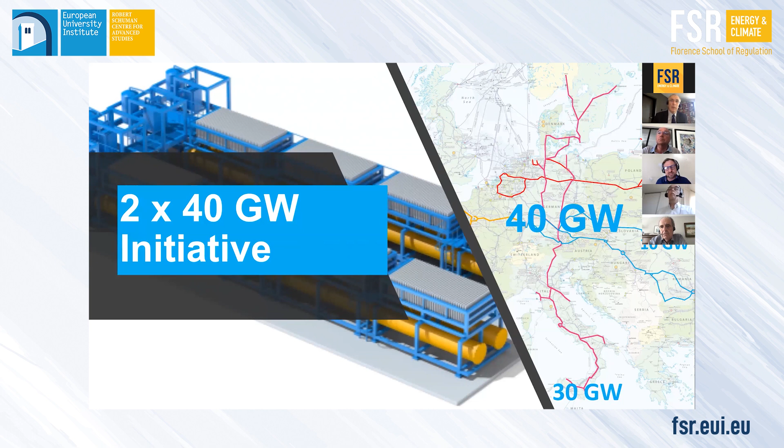Let me come to the next slide, please, which shows us the initiative that we discussed definitely with Commissioner Timmermans, and he himself had the idea to include this initiative into his plans. So it's called 2x40 gigawatt initiative. Next slide. You will see that we issued a brochure that you can download on a website which is called Hydrogen for Climate Action. Next slide.

Yeah, this is the paper, and we developed the paper together with non-Europeans. So 40 gigawatt would be in Europe and 40 gigawatt outside Europe. And we have here our Ukrainian friends who have ready pipelines that will be empty in some years, and they could produce, because they have also wind and sun in the east, and they are part of this initiative, like the Clean Energy Net, that's the Gulf Cooperation countries, the African Hydrogen Partnership, and DII, which is a follow-up on Desertec, and very much focusing on hydrogen.

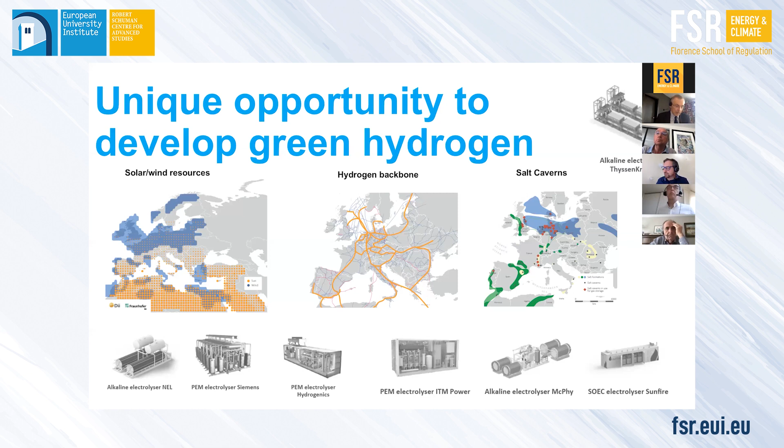Next slide, please. The roadmap says that we have 40 gigawatt production in Europe, where we would like to ramp up this capacity within the next 10 years. We have already a captive market of 6 gigawatt that could be used.

It was mentioned, refinery, fertilizer, and we would produce 34 on top for new customers, like in industry and in mobility. So this 40 gigawatt electrolyzer capacity in Europe would produce 4.4 million tons of hydrogen in 2030, representing 25% of the total EU hydrogen market in 2030.

This shows some dimensions. In Africa and Ukraine, it's a little bit different because you already have a bigger captive market in some of these places, like Morocco, where hydrogen is already produced renewably and already used in the fertilizer industry. So it's quite interesting. And that intrigued, I think, the special interest of the Commission. We have heard that in the college, it was not only the mentioned commissioners interested, but also others, the ones who are responsible for development. Andris knows this field very well, or the commissioners who are responsible for the neighborhood policy, because you can create value in this neighborhood, especially Northern Africa.

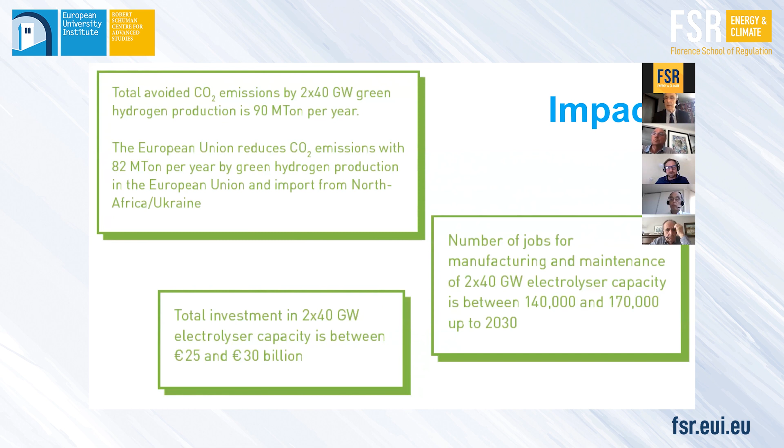Jorgo, I'm sorry, could you wrap up, because we also have other speakers. They are the last slide.

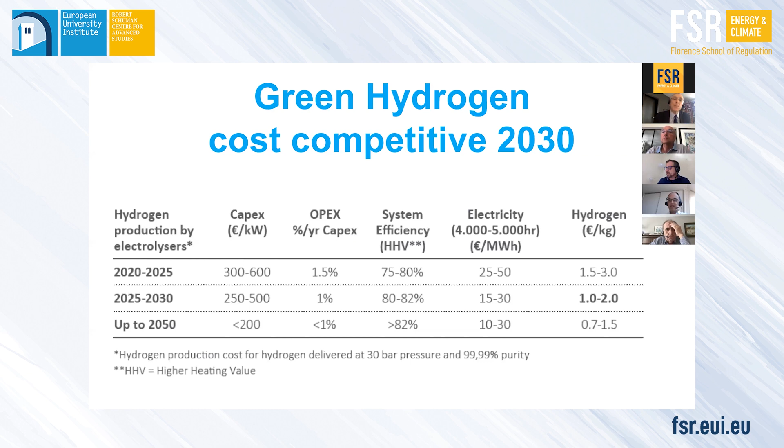Yeah, thank you. And what you see is that the efficiency also needs to be brought up. This is also an important part of this equation, and that's why we need to be still active. Next slide shows, and I will use this as the last slide, that this is not only energy policy. It's not only a policy on innovation, it's industrial policy. So if we scale up electrolyzers, we can integrate much more wind and solar using hydrogen. So we are not against wind and solar. Hydrogen is the partner of it, and it could really outcompete very, very fast other actors and players.

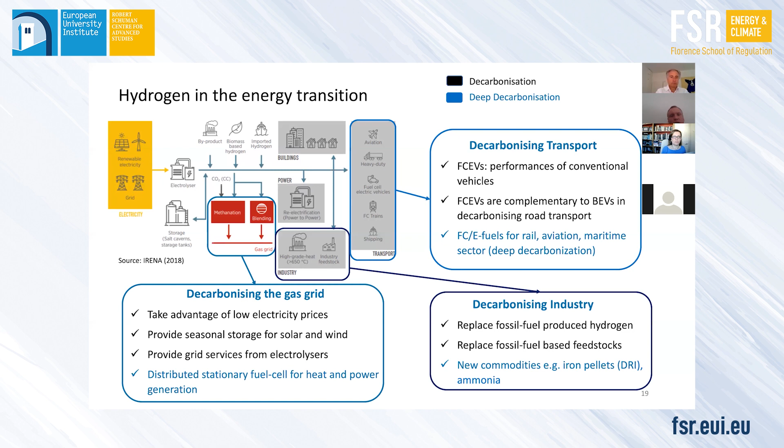Next slide, please. So as was said, hydrogen is not an energy source, it's an energy carrier. You need to produce it from some primary energy source, but it has a wide range of applications that are discussed today. Next slide, please. So we just issued on Monday our latest global outlook, the Global Renewables Outlook. And in that outlook, we also identified a key role for hydrogen and especially for green hydrogen in the global energy transition. Next slide, please.

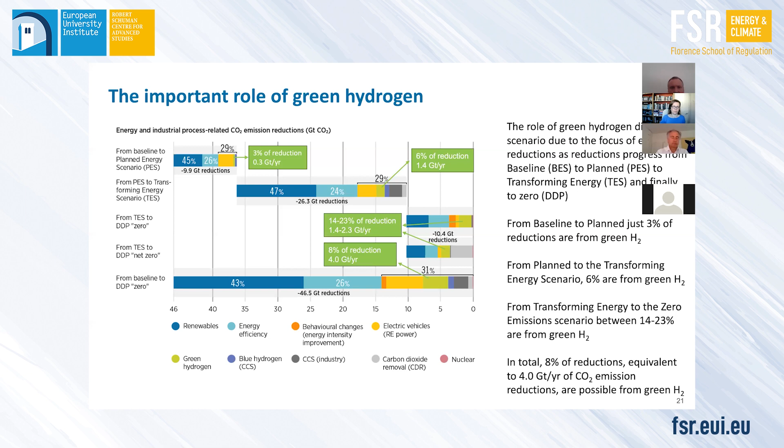And the advantage of hydrogen as an energy carrier is there is a lot of experience with hydrogen. It's a commodity today. Around 120 million tons of hydrogen are produced and consumed every year. And we think by 2050 that may double in this Transforming Energy Scenario, the well below 2. It may quadruple or even grow stronger if we go for total decarbonization. Next slide, please.

And the role of green hydrogen is very important. We think that an important share of total final energy demand can be supplied by green hydrogen, around 8% by 2050, and that up to around 20% of all electricity in this well below 2 Transforming Energy Scenario would be used for green hydrogen production. Next slide, please.

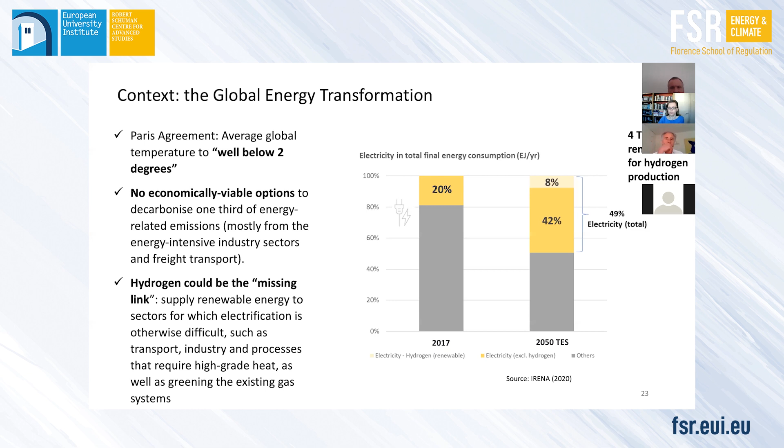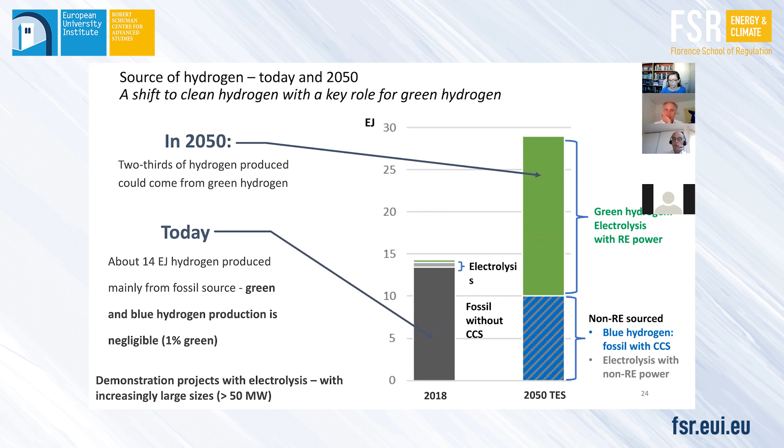And so today, only 1% of all hydrogen is green hydrogen. We think by 2050, 2/3 of all hydrogen could be green hydrogen, and around 1/3 would be blue hydrogen. Next slide, please. Now, what is critical for that is that the costs are reduced to acceptable levels. And to give you an idea, what is an acceptable hydrogen price? If you have hydrogen at $3 or €3 per kilo, then you need about 8 kilos of hydrogen for a gigajoule of hydrogen. So a gigajoule of hydrogen would cost around €25.

And today, a gigajoule of natural gas costs less than €10. So at €3 per kilo, hydrogen is still a premium fuel. You need to get to even lower prices. Now, how do we get there? It requires two things. It requires very low-cost renewable electricity, 1 or 2 cents per kilowatt hour. If we're at 4 cents, you will not reach these levels. And that is important for the discussion about, are we going to produce in Europe or are we going to produce elsewhere?

Second point for the cost reduction is the cost of the electrolyzer. So Jorge already presented this $200 per kilowatt. Today, we're still quite far away from that. And also we need to be careful that we're talking here about costs of projects, not just the cost of the electrolyzer machine. There are also significant balance of plant costs that need to be considered. So there is still quite a long way to go to these low costs, and we should pay sufficient attention there. Next slide, please.

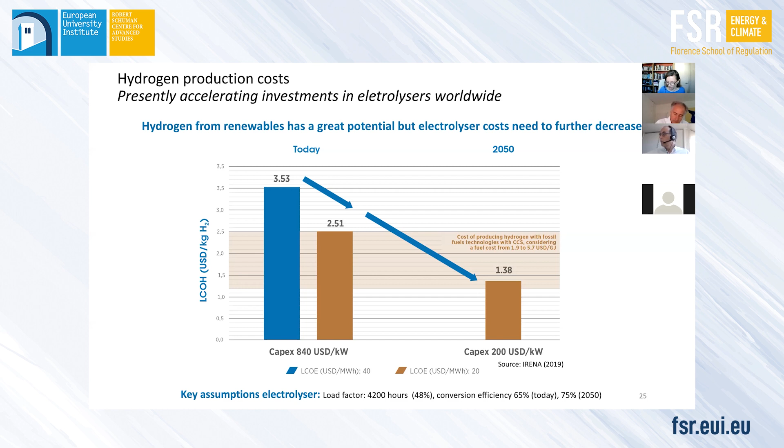Now, we also see important opportunities for hydrogen in hard-to-abate sectors. One of the sectors where we had a closer look is the iron and steel industry. There are currently initiatives to produce direct reduced iron in Europe with hydrogen. But you could also think of using green hydrogen at the places where you mine iron ore and ship the DRI to Europe.

We saw in the Commission presentation that there's thinking also about hydrogen imports, but why not import commodities produced with hydrogen? That may be a strategy that is easier and more economic to implement than importing hydrogen. So that's an input to the discussion. Next slide, please.

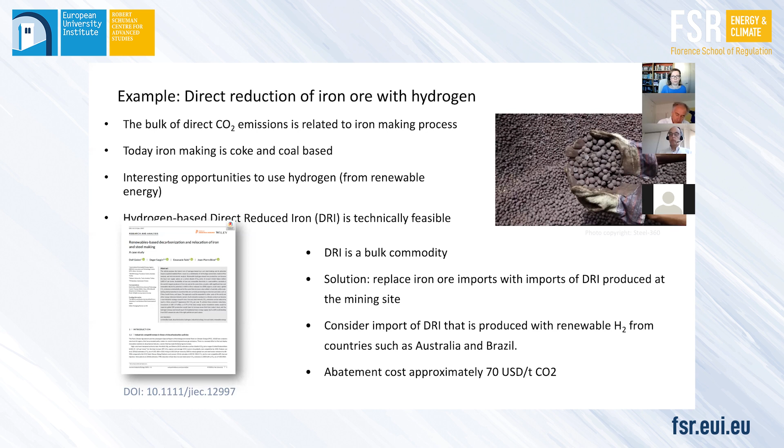Also in transport, we see interesting opportunities. One of the sectors where this is discussed is shipping, where there's now strong interest in ammonia produced from green hydrogen as a fuel. Currently the first tankers using ammonia fuel are being built. It's still early to say whether this is the solution that will be selected, but there's a lot of attention for this option at the moment. Next slide, please.

Then, the issue of hydrogen in gas pipeline systems. A lot of attention there, but we need to be very aware that there are important standards and regulatory barriers that need to be tackled before we can move to a hydrogen transition in this sector. That's usually an area that requires time for adjustment. So that also needs attention if you want to go well beyond 20% hydrogen in the gas system. And then next slide, please.

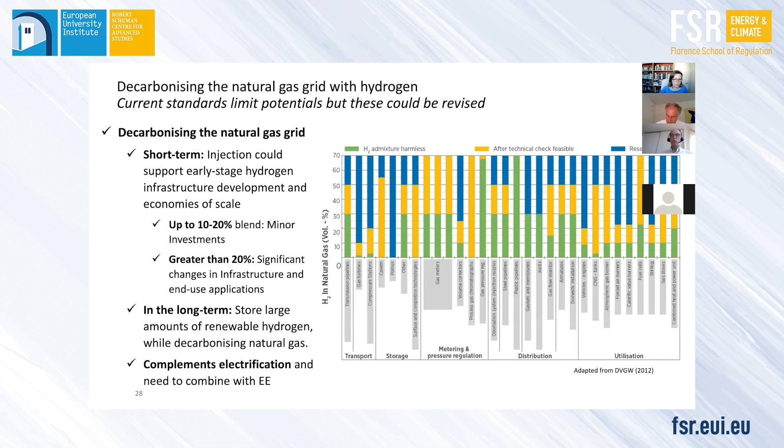So this is my last slide. As said, we see a great role for green hydrogen. We're very happy that in Europe that's now so high on the agenda, and we're happy to support this transition. Thank you very much for your attention.

Thank you, Dolf, for an excellent presentation and also for keeping time. That was really remarkable. Now I would like to give the floor to Kees van der Leun. He's director at Guidehouse, and I think well known to the communities that will be listening to us. Kees. Thank you, Andris, and welcome all. Yes, Guidehouse, you might know us by our previous names of Ecofys and later Navigant. We're still there.

Today I want to speak to you about a new study that we've just published this morning. I also shared the link in the chat, and that's for the Gas for Climate Consortium. The Gas for Climate Consortium consists of 10 European gas TSOs, the transport companies, and 2 renewable energy associations focusing on biomethane. We've been working with them for 3 years now to analyze the role that the gas infrastructure can play by transporting renewable and low carbon gases in moving towards a net zero emissions EU energy system.

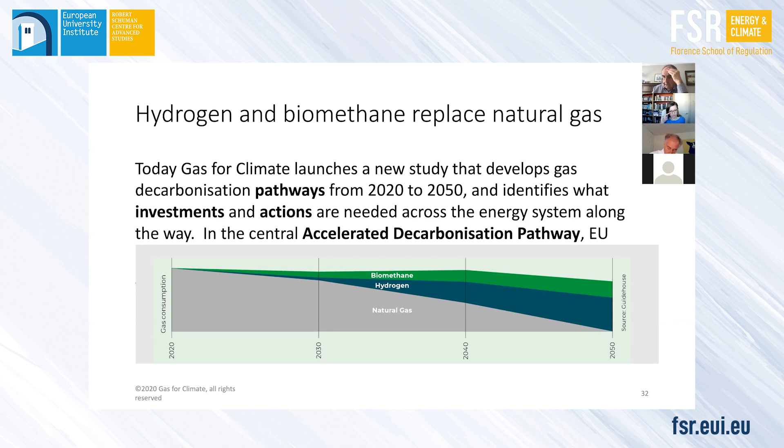You see a role for biomethane. That's refined biogas from anaerobic digestion, so from agricultural waste, but also from sequential cropping, a new agricultural process developed in Italy and France, for example. And you see there also in the blue band the growing role for hydrogen in our view on the EU energy system. Next slide, please.

In this accelerated decarbonization scenario, we're looking at a CO2 price of 55 euros per ton CO2 by 2030, and that should be roughly enough to see the conversion of a lot of current gray hydrogen production, from natural gas without CCS, by adding CCS to blue hydrogen. That's already a decarbonization measure in industry that can be taken quite rapidly, and there are sizable projects already in an advanced stage of preparation.

Then we see potential to also develop new blue hydrogen plants to some extent, and that could be based on autothermal reforming, a technology which enables a higher capture rate at more attractive costs, and that could deliver another 430 terawatt hours by 2040. When I speak about terawatt hours, you can think about the current natural gas consumption in the EU, which is around 4,500.

So this would be a little under 10% of the current natural gas consumption. Those blue hydrogen hubs do not have to wait for a big expansion of renewable electricity, and as I said, they can piggyback on existing gray hydrogen production. We would expect them to develop first in industrial clusters around the North Sea, where most existing hydrogen production plants are located, and where also the possibility for offshore CO2 storage in depleted gas fields exists.

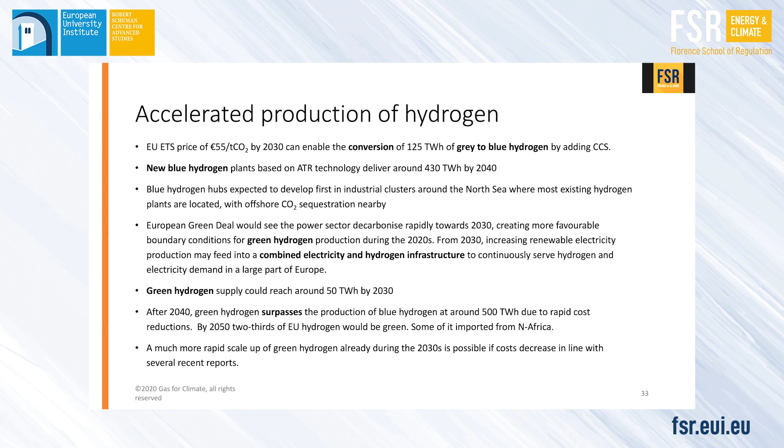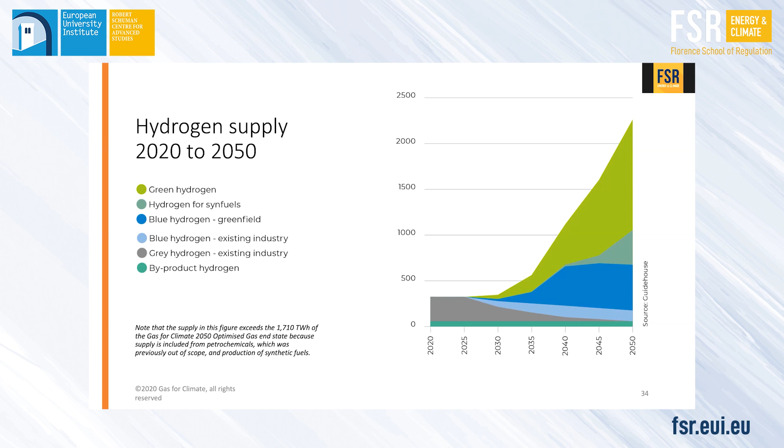So if we could go to the next slide. Or was that already my last slide? No. Then this would be the timeline for developments in our view.

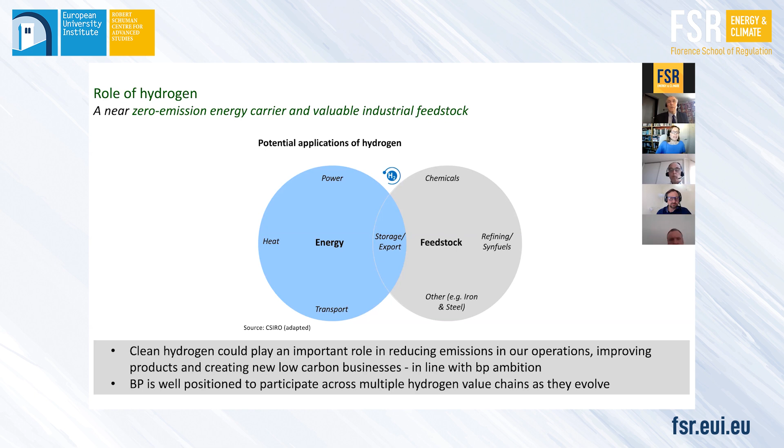So as kind of represented on the chart, we see, similar to the many other speakers and many other advocates of hydrogen, broad application across energy systems, and we believe particular potential of hydrogen in delivering heat to industry and buildings, where it can provide an effective solution for interseasonal storage. It could also be a valuable solution, and probably the most competitive solution, for heavy transport.

As some of you already discussed today, and I know that's kind of a view out there, the ultimate scale as well as pace of hydrogen demand will depend on policy support, development of required regulation, and investment in associated infrastructure. I would like to emphasize that with the exception of today's hydrogen usage for ammonia production and at refineries, the projected applications of hydrogen demand that you see here are effectively about creating a new demand, a new market for